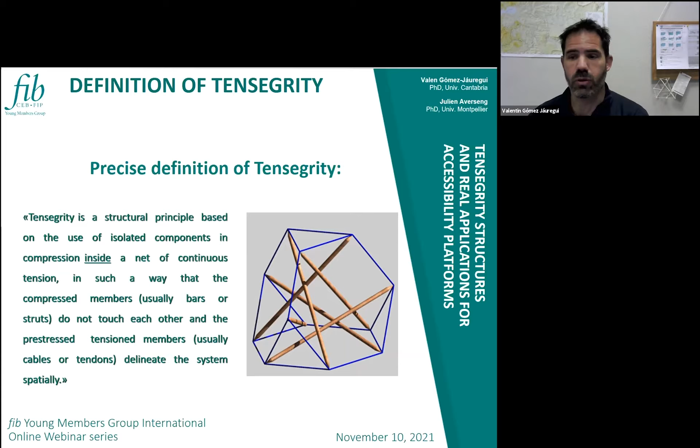What is a Tensegrity? This is one of the accepted definitions of a Tensegrity structure. It's a structural principle - not just a structure, a principle - based on the use of isolated components, in this case bars, inside a net of continuous tension. The tension in this case is composed of these wires, elastic bands that you see in blue, in such a way that the compressed members, the bars, don't touch each other. They are isolated and attached mainly by tension members, which can be these elastic bands, membranes, or any other tensed element. Very importantly, the boundary of the tensegrity is composed of members in tension - there are no compression elements around the boundary.

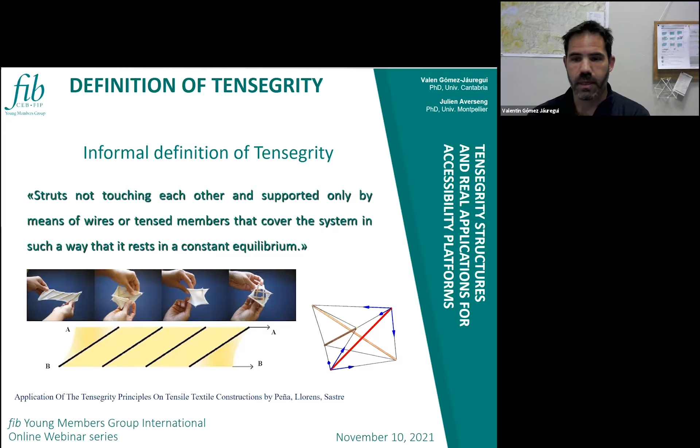There are some other examples and definitions, but in this slide I want to show you another possibility of changing those elastic bands for membranes, as you see there. Many other definitions exist, but one of the most important sentences about tensegrity was given by Buckminster Fuller - we'll talk about him later because he's one of the fathers of tensegrity.

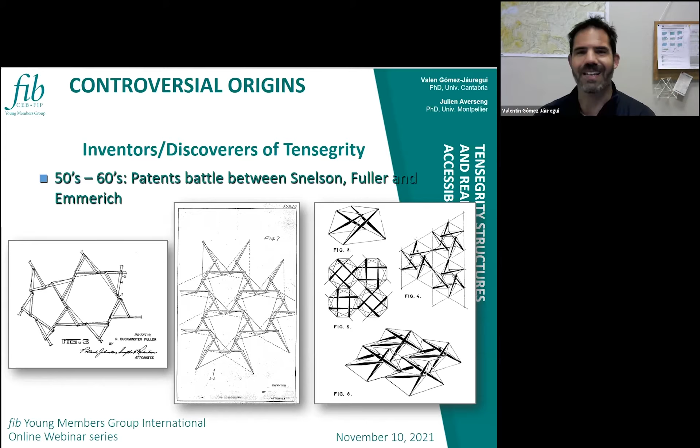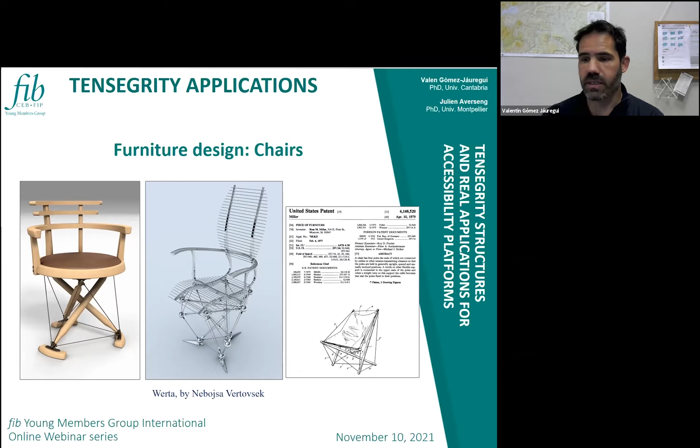You can find tables, lamps, and some other applications related to animals. On the left, you see an aviary in London, and on the right, you see some cages for fish that are composed of tensegrity structures.

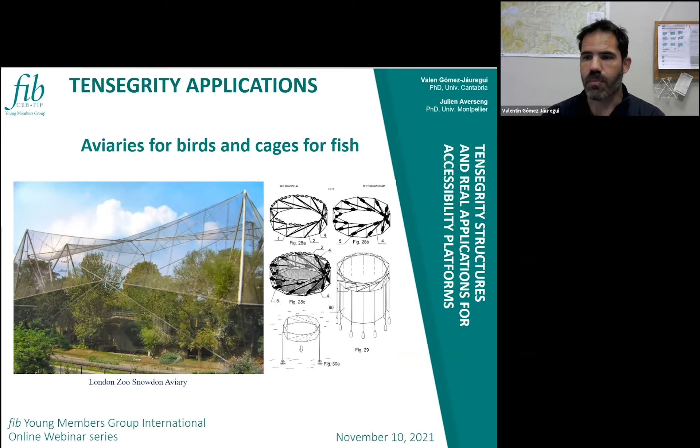Some other applications are related to space. There on the left, you see a boom structure that is deployable and tends to be a kind of antenna that can be deployed. You can bring it to space very easily in a very compact form, and then deploy it once you are there out in space.

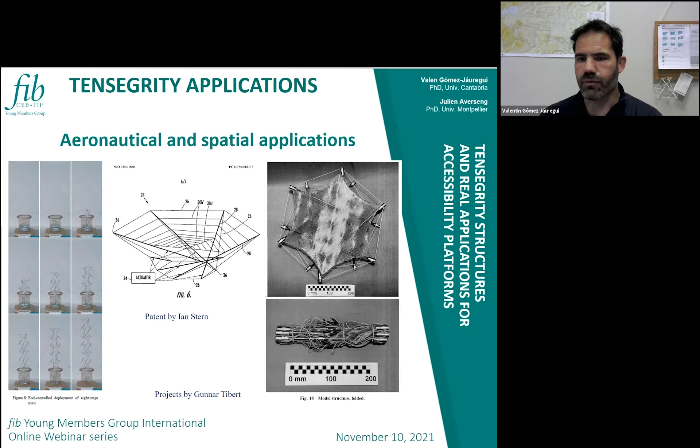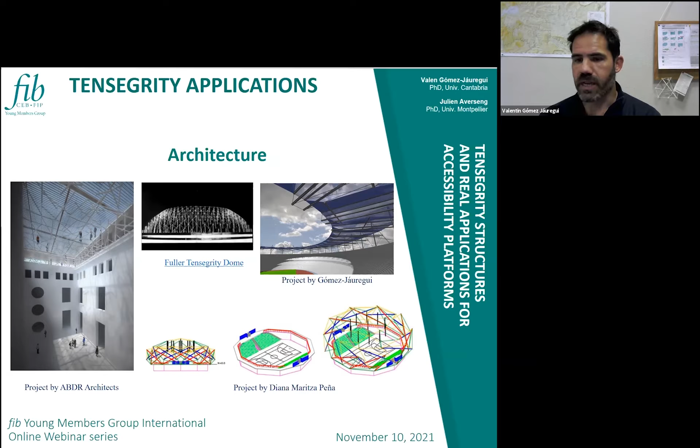In architecture, there are also some examples that you can see. Some roofings, some domes, stadiums, or omnisport halls. And finally, well, some other examples of different kinds of projects or proposals.

Now I'm going to focus on the double-layered Tensegrity grids. There are some kinds of grids composed by two layers, one on the bottom, one on the top, composed by wires. You have also some web wires going in the middle, and there are also some struts composing the whole structures.

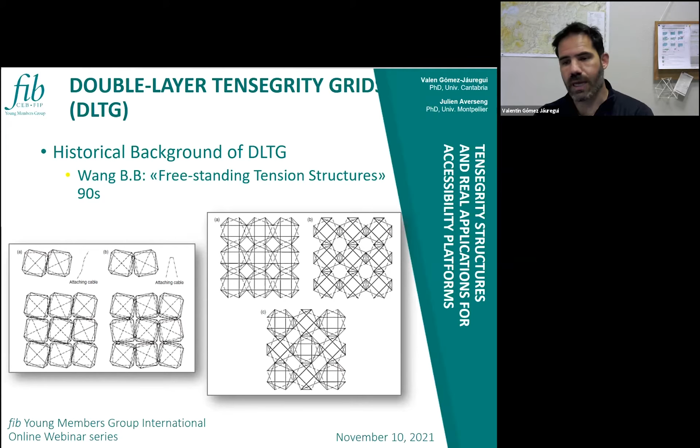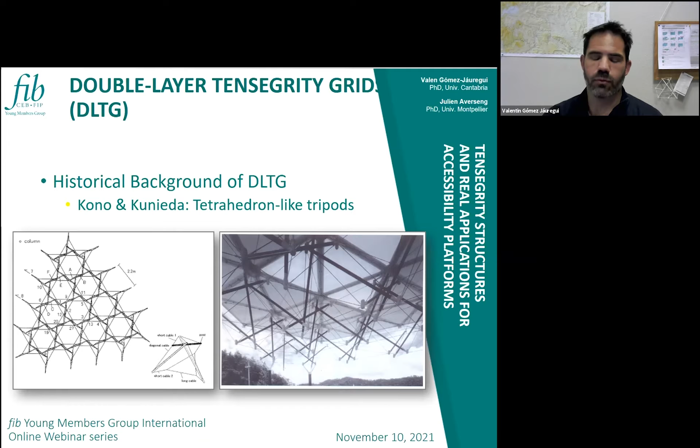Emmerich in France also created or designed different typologies. Wang Bingbing wrote a whole book about different typologies, and the grids were also very important. Kono and Kunieda created a different kind of structure, building some prototypes where instead of using prisms, they used pyramids, truncated pyramids.

And finally, well, most importantly, because Julien belongs to the University of Montpellier, this research group, led by René Motro, created the Tensarch project. There you can see some proposals that are going to be explained by Julien later. And well, these are some other variations of this project, of the Tensarch project.

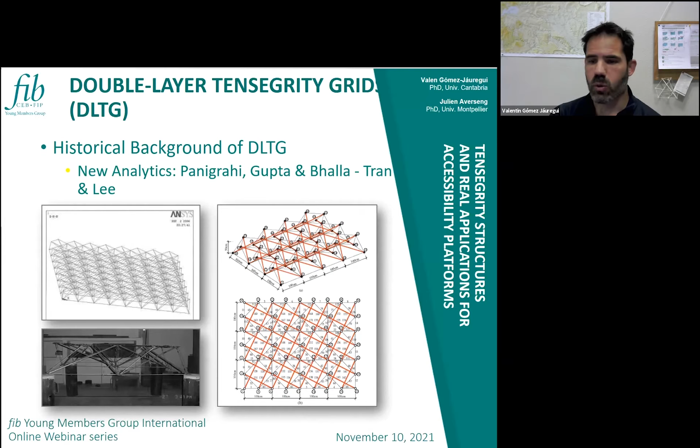Well, in the last years, there were also some other projects. And here, I don't know if I can reproduce an example that we did in Limerick, in Ireland, with a different kind of module, which is the one that you see there.

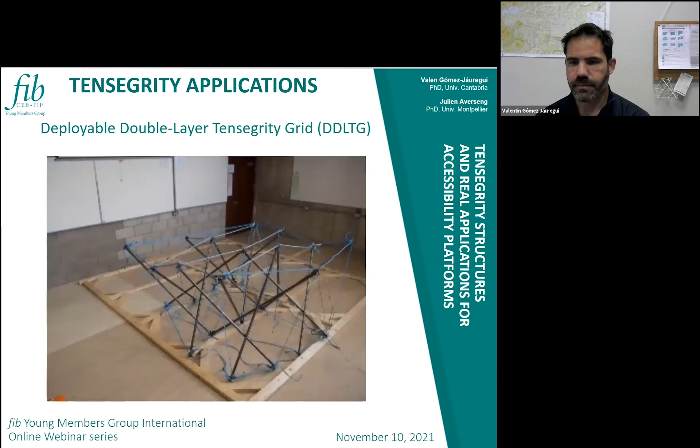And here we can see the construction process. This part is a prototype of 2 by 2 meters using strings instead of wires. There is the folding state. And then we reproduce that for the 4 by 4 structure.

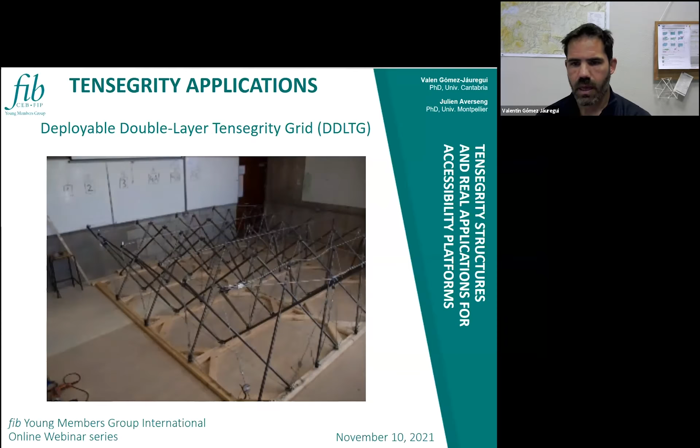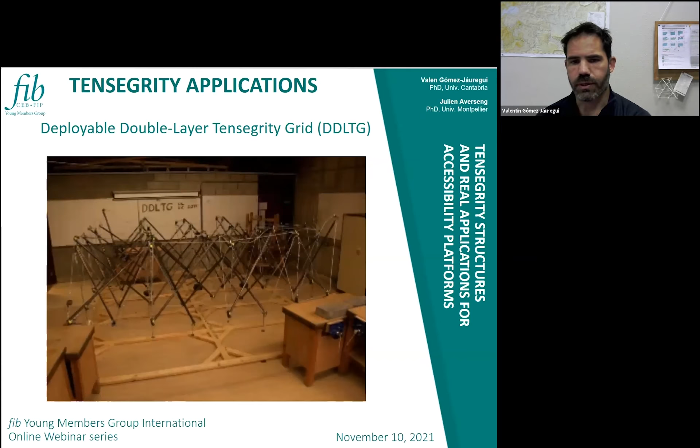The wooden base was configured to set the exact position of the nodes at the bottom. Once the structure is configured, we started to load it, to see the resistance, which was very good. And finally, we did the folding states.

And there is the final structure once it's deployed. Folded.

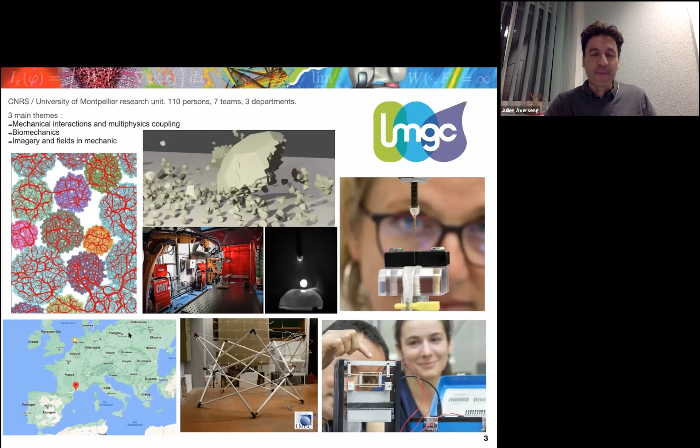I made a slide but won't stay too long on it. We are here in Montpellier, and our lab is interested in mechanical interaction, multi-physics coupling, biomechanics, imagery. We do both numerical and experimental studies, and also Tensegrity and deployable systems.

The context of what I'm going to present is a project proposed by architects based on the observation that there is no solution for disabled people to go to the sea in full autonomy. This project, POSEIA and C4All, wants to improve that by providing solutions for accessibility for all, while also respecting the littoral law, which requires setting up structures only in spring and dismantling them in autumn. To be viable, it must be fast and easy to use for local operators, either private operators on the coast or public cities.

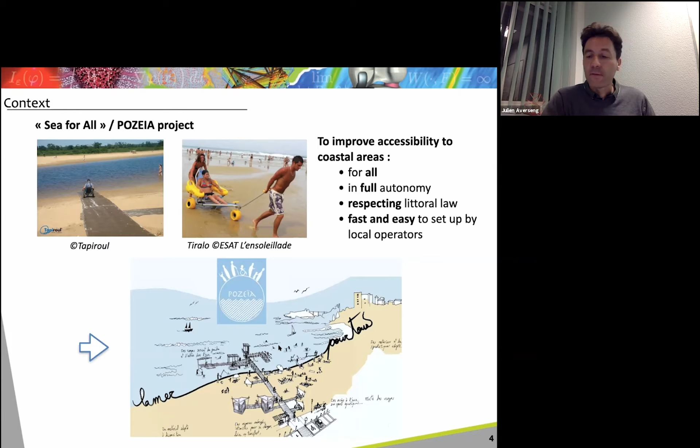So the concept is sketched here. It's a zone with access via the road, with buildings providing the possibility to change, and a structure in the sea with elevators which allows disabled people to do recreational activities.

What we did with this concept is propose a solution for the platform part: a deployable platform on which we can install autonomous equipment like elevators.

Our inspiration is a solution that exists in France called 'un fauteuil à la mer.' This structure is next to a bar and a private beach. On it there is equipment like a water elevator that can be used by disabled people in relative autonomy, as you see in this picture.

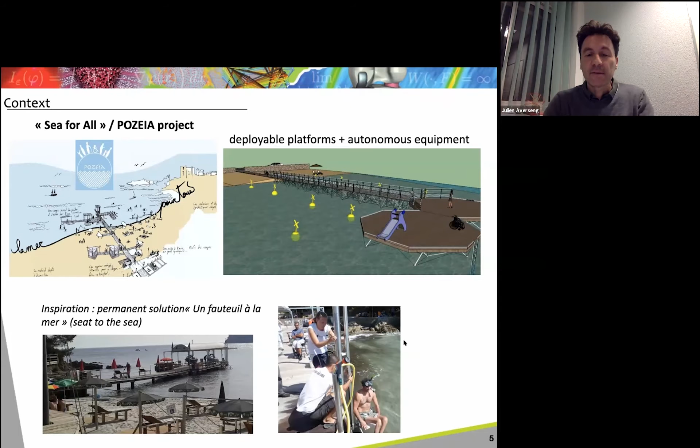Our goal is to make the same thing, but completely deployable and dismantleable, so as to leave the site completely clean after usage in winter. So the platform is to be assembled using Tensarch grid modules.

Tensegrity is a topology that Valen showed you; I will go back over it. The principle is to have modules that can be deployed from small bundles, and we can arrange these modules to build any kind of platform.

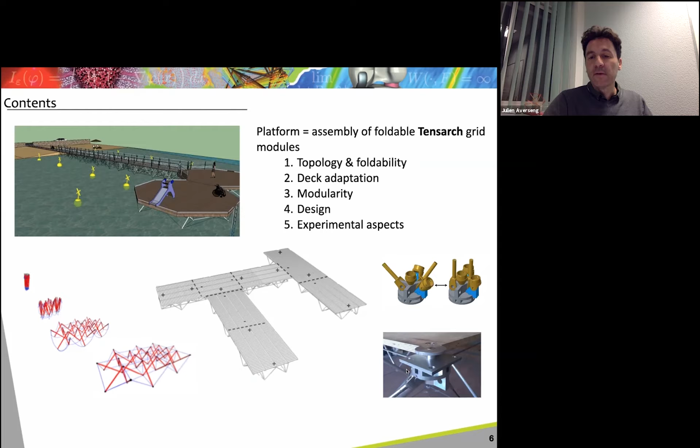This is a summary of my presentation. I will talk about the topology and the interest of foldability with this solution, the adaptation to support the platform and its modularity, the consequent design problems, and finally the experimental part with fabrication and setting up.

To remind you about Tensarch: it's a concept proposed by René Motro in the late 90s, built and concretized here in Montpellier in 2000. Here is a photograph of the great grid, which is 80 square meters. The principle of Tensegrity is a weaving of struts, just like a fabric.

It's a class 2 Tensegrity system, because you have 2 bars at each node, except at the border nodes, which receive only 1 bar. The struts are surrounded, as is the principle of Tensegrity, by a continuum of tension formed by 2 layers of cables, plus boundary cables that finish the stitching around, and vertical tensioners.

So to give you an idea of Tensegrity, it works like inflatable systems. If you have already used inflatable paddles on the sea, you'll see the structure is quite the same, with vertical tensioners, fabric vertically connecting the two surfaces, and the pressure inside acts like the struts in our case.

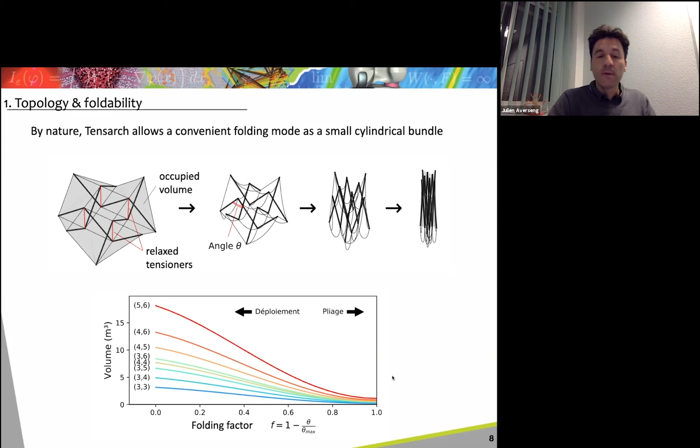About the foldability, Tensarch is really convenient. As you see in this picture, it's only sufficient to detach just a few elements, here the vertical tensioners, to eliminate any self-stress in the system. So, like opening the valve on an inflatable system, you have no pressure, no tension, and you can fold it into a small cylindrical bundle. This diagram shows the gain in volume when you fold the system.

To use it as a platform, we have to put some plates, deck plates, on it, but the Tensegrity topology doesn't offer enough supports. So if you do that simply, you have some parts of the deck that will be in cantilever.

So in this particular solution, we add an additional substructure formed of vertical bars and diagonal bars. The idea of this substructure is to redirect the vertical load onto existing nodes. On this node here, you see the force goes directly into this node, and then the distribution of force goes to the supports. For the corner node, it's the same.

The force goes diagonally down onto this node, and to be equilibrated at this location, you need to have a cable that is attached to this node. So this is the static equilibrium principle of this additional structure.

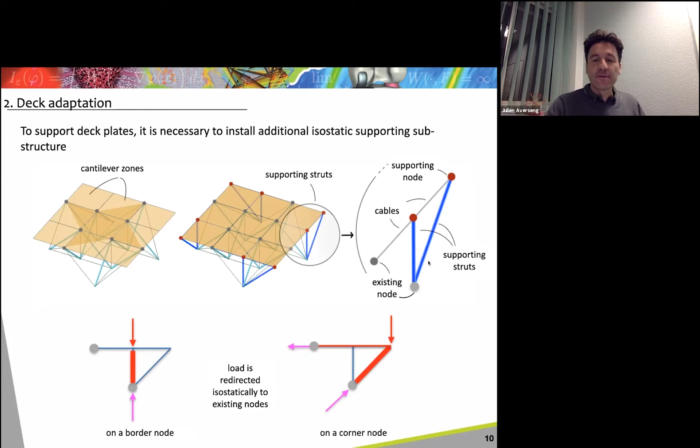The modularity is really important in our solution, because we cannot build a foldable platform of a large surface in one piece. It would be impossible to manipulate or handle it. So we work with several small modules that we attach border to border.

With the Tensarch, which is a regular weaving, you have naturally modularity, but you have to pay attention to the border and to the direction of the pattern of the bars and the nodes. You see here a pattern of layered cable on the surface with cables turning on this side, and to connect correctly, you have to have the inverse pattern on the other side. It's just a small amount of work when building and designing a platform by juxtaposing these modules.

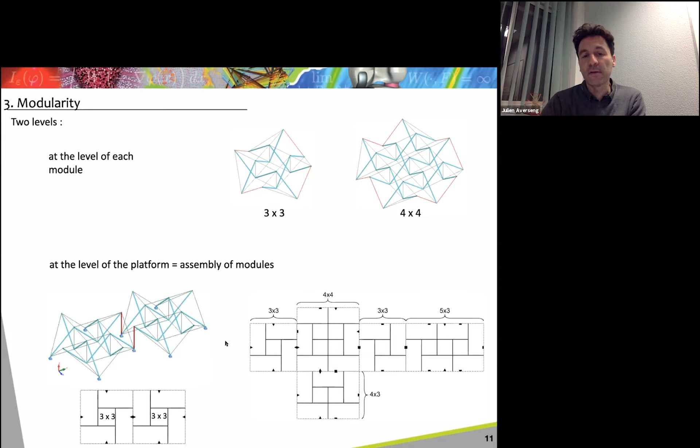After that, you have a complete continuous set of vertical support for the deck. This is the problem I was mentioning: you cannot do that because it's completely inefficient and you don't have any support on the side. You have to invert the two orientations of the modules. We also have the possibility to connect modules with different heights, to adapt to the profile of the land.

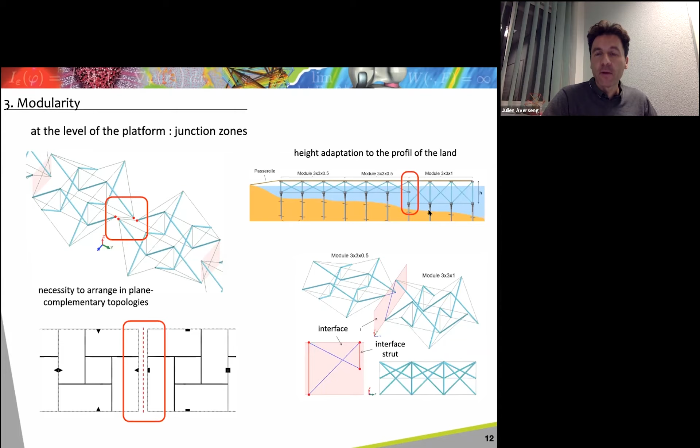You see here how this solution works. It actually works by being supported on the ground. Obviously, it's not floating in the sea. So we can adapt and make a rigid structure resting on the land, and we can adapt to the profile of the land.

On the design part, using these constraints, I won't go into detail for bars and cables, which are standard elements, but the real challenge in every Tensegrity system is the nodes, because they have to ensure convergence of forces, and we have many elements for some of these nodes.

In our case, the nodes must allow folding by letting the bars rotate relative to one another. We also want to minimize the complexity of the solution, so as to have only 3 types of nodes, represented here: center nodes, which we call regular nodes, border nodes, and corner nodes that connect cables with 2 different orientations.

So you have here some drawings of the mechanical models, and you can see the complexity of the design respecting all of this.

On the design, we also have to dimension the sections of the elements, the cable and the bars. So for that, we have to deal with the self-stress that we will have to introduce in the structure, and also the variation of internal forces during usage when you have a vertical load on your platform.

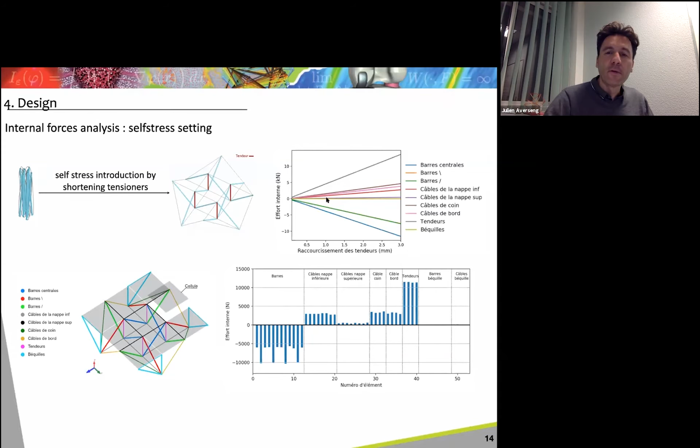So when we use the self-stress system, we do that by shortening the tensioners, by rotating them. It's just a system of screws. And the shortening is very small, on the order of only a few millimeters. So the response in the structure is quite linear in this case.

So don't worry, I won't present some complicated charts, but just internal forces bar diagrams. And about the design, we have to pay attention to and optimize the position of the supports.

So here is the first study on different kinds of supporting possibilities. You have here in black the supports in the corners, or just on the four lower layer nodes in the center, or here a mixed combination of the two previous solutions.

And we have here the consequences when loading these modules by a force of 3 kilonewtons per square meter, and the initial self-stress of 0.2%, and the consequence in internal forces and also vertical displacements.

And we see that with this solution, we minimize vertical displacement. So this is the optimum solution for this small module. The other solutions are less optimal, and particularly this one with an increase in forces.

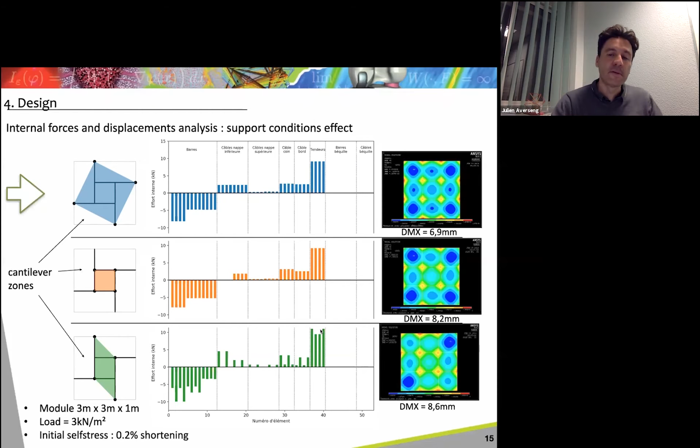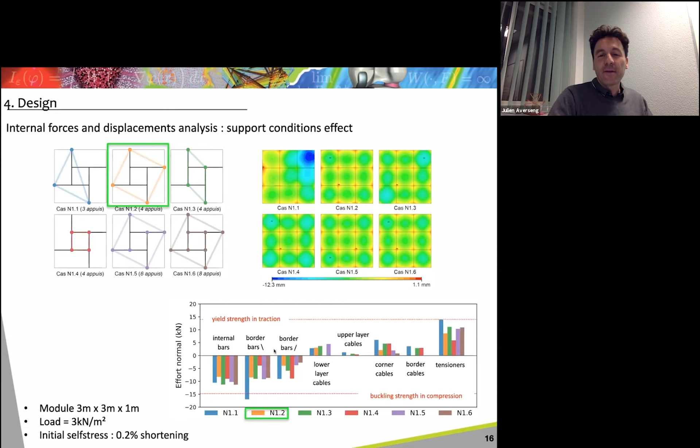We were also interested, well, this is the same, but presented differently, with the sum up of the different families.

We're also interested in the same study by optimizing the number of supports, because the creation of the support in the sea is quite laborious, so we have to minimize it.

It's not a great gain in the number of supports, but it's necessary to ensure not so important vertical displacement, and also not so intense variation of tension in the internal forces of the elements.

And we see here for solutions like that, that we have too many forces after loading. We are going beyond the yield strength for the cables, and even the buckling strength in compression for the struts.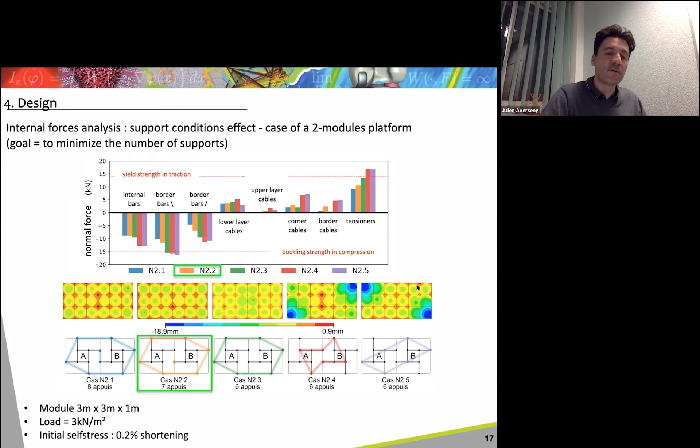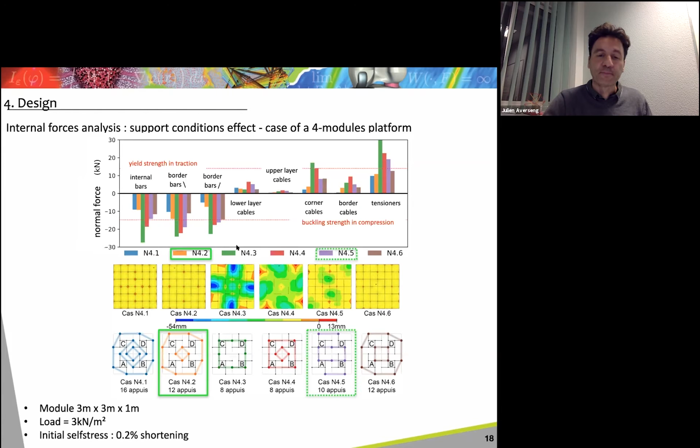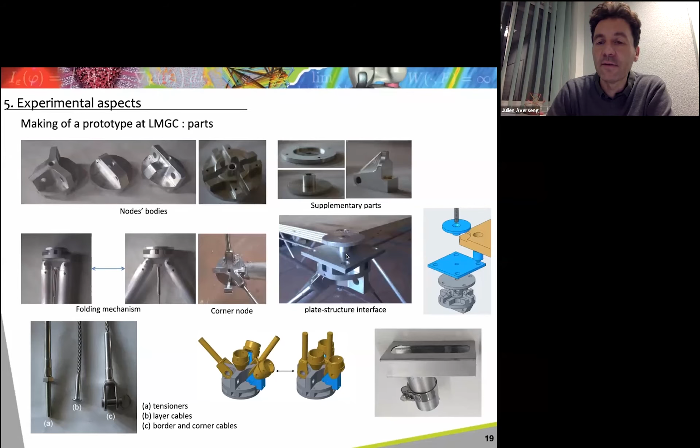And also on the practical parts, we have here the interface between the supports and the structure itself, using a translating system that allows correcting the imprecisions in implantation of the supports. And here a design of what you see in photo of the connection with the plates.

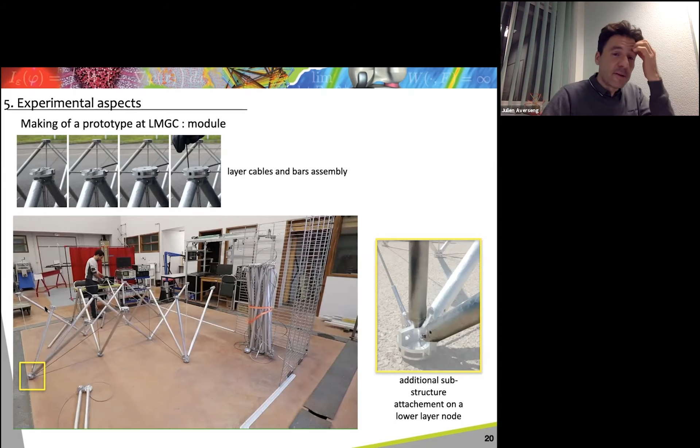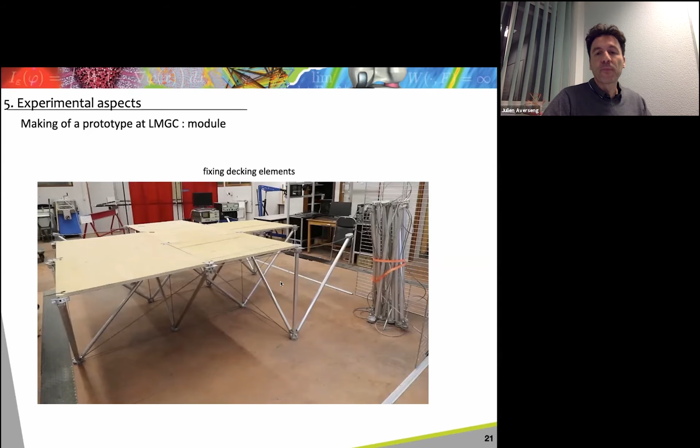So here's an illustration of the deck. You see here the substructure system, the isostatic system that is added afterwards. We have the same here. And then the structure is complete.

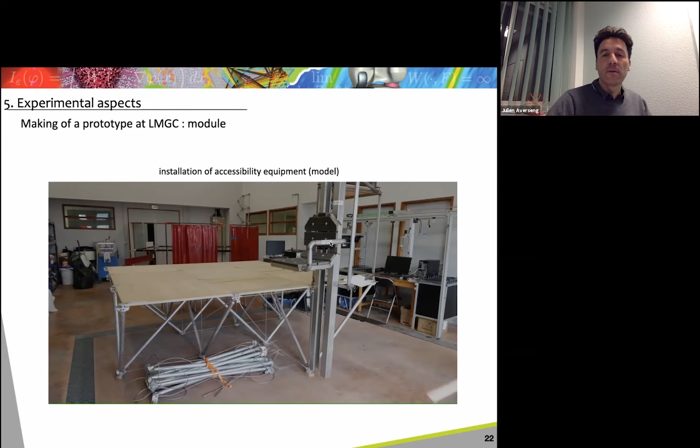We also added on it - I won't go into detail - but we added a model of accessibility equipment, which consists of an elevator to ensure translation in the water for disabled people.

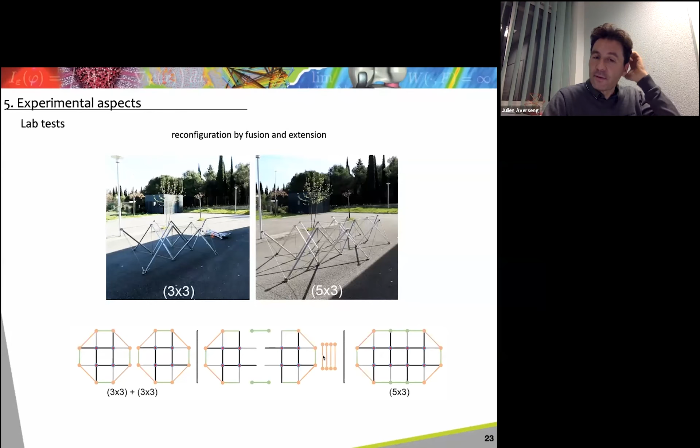And the reconfiguration works because it's modular - every layer cable is the same, each bar is the same, we have the same tensioners. So we can just play like Lego, dismantle a part of one module to connect it to the other and form any other module.

Here's the tensioner. It consists of a bar with a turnbuckle that allows us to reduce the length precisely.

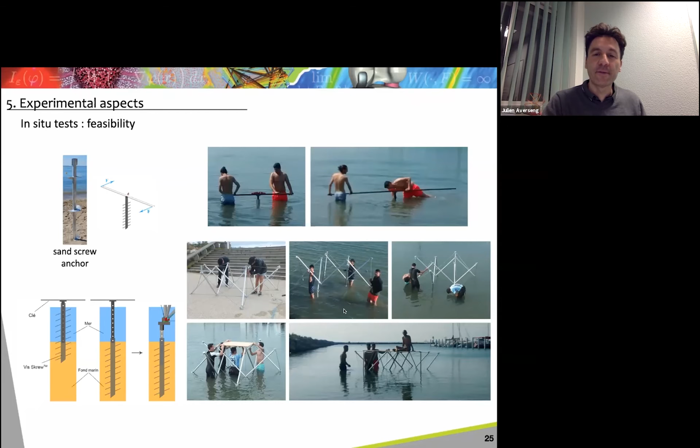In this first test, we couldn't put any more deck plates because there were problems with the precision of the implantation of the supports. After that, we did also some other tests here on open sea, on open coast. We could tackle the difficulties of implementing the sand screw anchors, and we succeeded in putting the deck quite completely, along with the complete structure.

Obviously this is not complete. These are first practical tests, and we have to improve that by improving the guiding and motoring tools that allow us to implement the screw implementation procedure. We also look for other experimental sites, which is not easy because all the coast is used for tourism. So in order to really test the solution and the effect of erosion, for example, we need a site with long or mid-term possibilities. But actually, we could demonstrate that we can implant a structure.

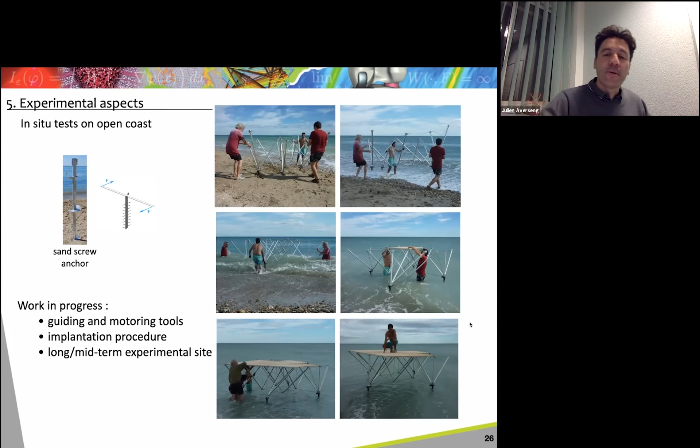We also have to test the modularity by implementing 2 systems and joining them on the sea. And also think about the other structures, the equipment, etc.

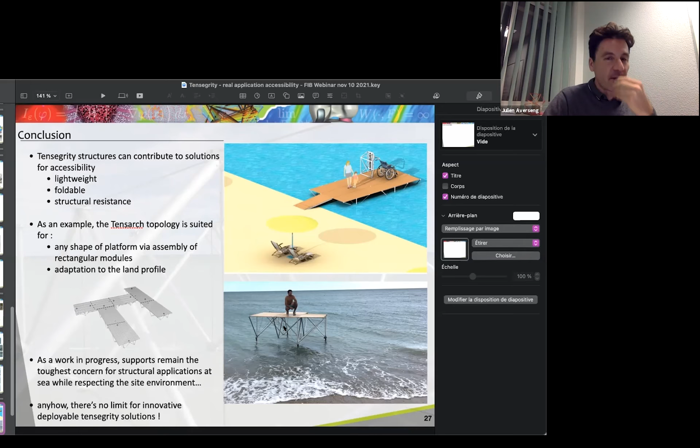So in conclusion, with this presentation I showed you that tensegrity structures can contribute to this kind of solution for accessibility by being lightweight, foldable, and structurally interesting. In this particular example, we can build any kind of platform using the rectangular modules. And obviously, there is also a lot of work to do with the supports, but this is another story that is going on at this time. So I will stop here.

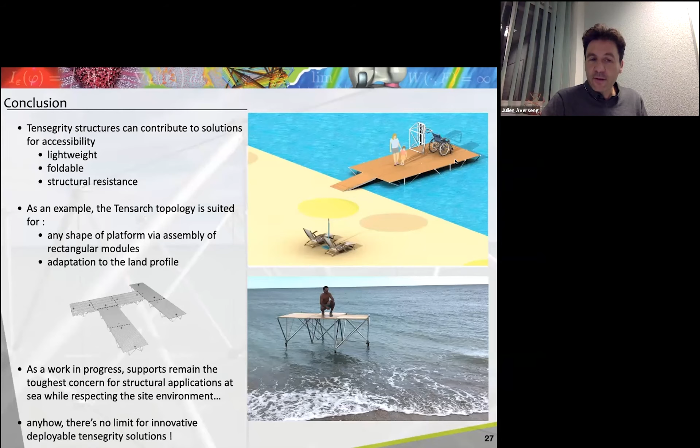Thank you, Julien. So now we will start with questions that you can write down on the chat. Ready for that? May I start also addressing some questions to you. So first, Julien, thank you for this interesting presentation. My first question would be for you.

Is this part of a project already closed, or is this something done at the university that will be serving as a practical platform for being deployed or installed in several points on the coast, or is this something very singular from your side? What is exactly the root of this project? Who was supporting this project for being performed, apart from your research group?

Yes, I didn't talk a lot about that. We are supported by our region, by public authorities. We were helped also by the metropolitan cities of Montpellier, La Région Occitanie, our region, and also supported by our university. This is what I am showing at this time. And yes, this is a work in progress, in pre-maturation. It's not ready to be used, as you see, but we are advancing.

In proposing this structure, the final destination is also an open question—well, semi-open, because we are targeting the local operators on the coast, the cities, and we are discussing with them to buy this solution through the intermediate of a company, maybe, that is to be set up. This is the work of our valorization service in the university. So the economical model is not quite finished, because we have to convince people that this solution is good for them.

And in France, accessibility is a real problem. So we have behind us associations and disabled people to promote this solution, but also public operators like the region.

So the idea is probably to install these platforms temporarily, during summertime, because these are not ready probably for wintertime. No, it's by design—it's meant to be temporary, because we have to respect the coast. And this is good also because the possibility to be easily mounted or dismantled is actually an advantage of adaptability.

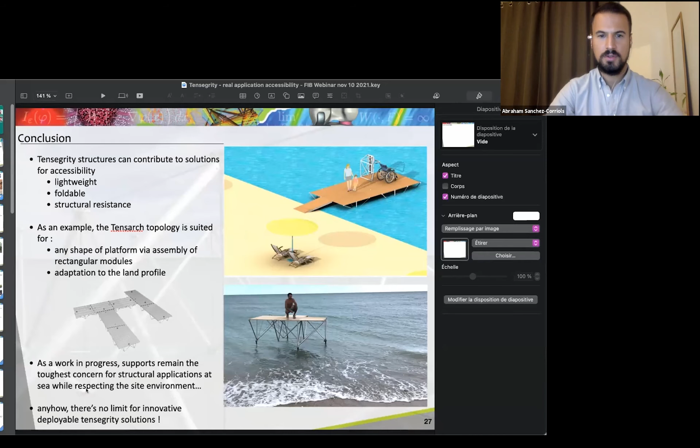Then the first question we received from Tomás Dalda, which also links up with my question—the next question I have for you both. Tomás is asking, are there limitations of this system? So for tensegrity structures in general, for large footbridges, large spans—I think that's what Thomas meant. My question is, do you both think that tensegrity is only oriented, or almost only oriented, for smaller structures?

Because so far we haven't seen any big projects developing tensegrity systems on big structures—domes, footbridges, bridges. We only saw one good example from Valen presented here, and otherwise smaller structures using tensegrity, but not big projects expected to use this structural system. So what are the problems there—deformations, materials, complexity of installation? What do you think are the problems?

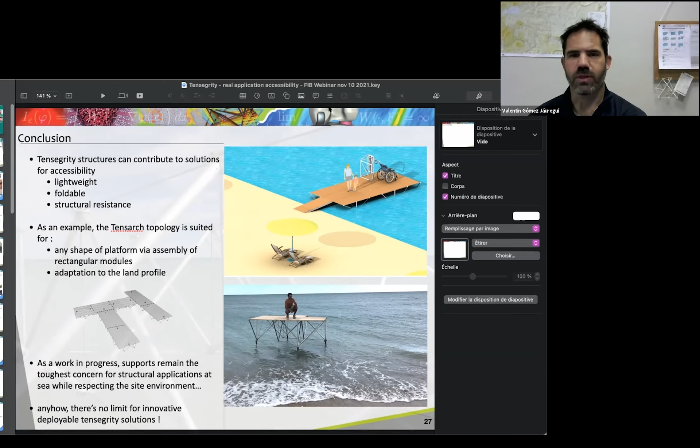Well, I think there are many challenges that we have to accomplish and analyze in depth. About deformations, yes, that's one of the main problems, but they can be minimized by using more elements, more tensed elements, for instance, or by changing the topology of the structure. However, it's more difficult to control the vibrations than the deformations, and there are many studies trying to minimize that effect on this kind of structure. As you see, these are very shaky examples, but whenever you build them with proper construction materials, you can have more efficient structures, as you've seen in Julien's presentation.

I don't know if we will see many pure tensegrity structures in the future for big structures or large spans, but I'm sure they will start creating hybrid structures using this principle to add more resistance in an aesthetic way to conventional structures. That's what some research groups working on this now are thinking about. But we shouldn't forget one of the most promising applications is in space, where the vibrations and deformations are different.

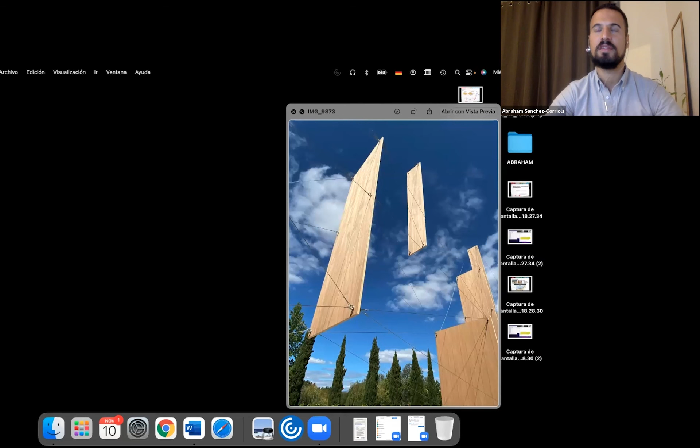He was an artist working with structural systems, and for about 8 or 10 years he has been doing this kind of structure, playing a bit with tensegrity. I would like your opinion on whether something in this direction could be used as a construction structure - architectural or even civil, applicable in a bridge in an easy way. We know tensegrity structures have their own problems, but what do you think about having these applications with simple materials in relatively fast construction for this purpose? One example is what you presented, Julien, and the other is this tensegrity structure, which appears very simple, but I assure you it is not.

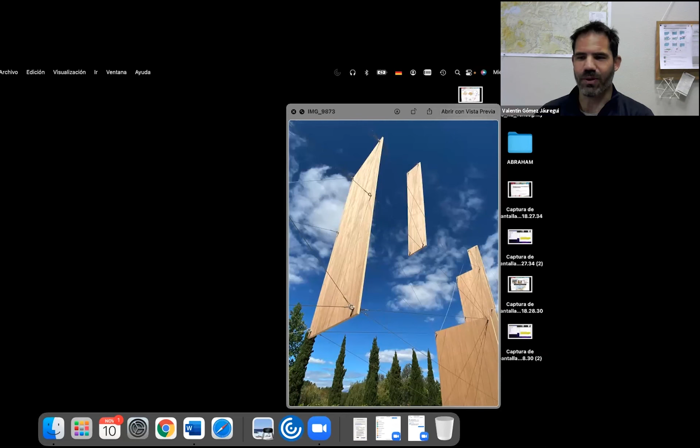Well, I know the example because I know Jordi Gali, and his works are amazing, even if he's not an engineer or an architect. He has some other examples that are also very interesting. I think nowadays we are not ready for adapting that to a resistant structure, but it could be added to an architectural system in different ways. As Jörg Schlaich used to say, Tensegrity is food for thought. This is one of the examples we should take into consideration to include it in architectural projects or designs. I don't know what Julien thinks about it.

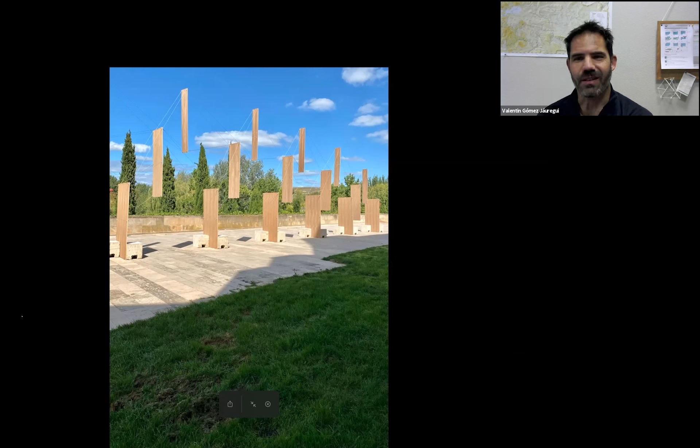So what I saw in this sculpture is more of a tense system that also exists in structural engineering. You have cable beams you see in a facade, in a roof, in a glass facade, which work on the same principle with cables and struts perpendicularly. So some application of what I saw already exists.

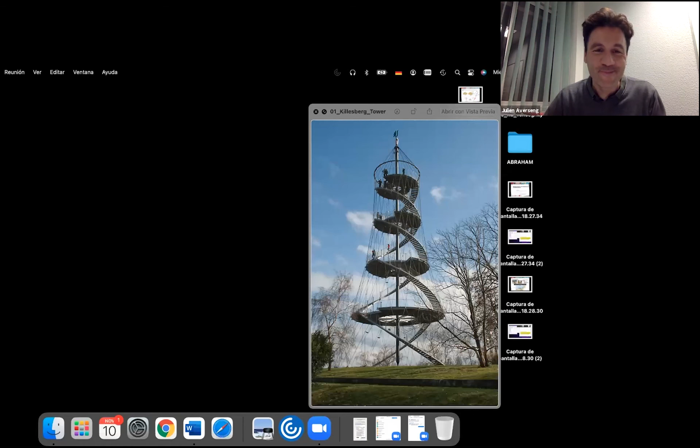So I think my personal perspective is that engineering in general, structural engineering, can go for these kinds of hybrid structures. If I show you some examples from Schlaich's office, it seems to be tensegrity structures, but these are not. According to Valen's concept presented here, these are not tensegrity structures. Partially maybe we can consider them as tensegrity structures, but they are not.

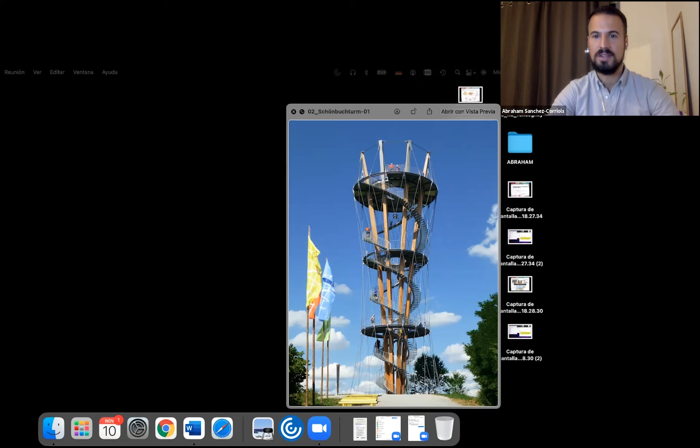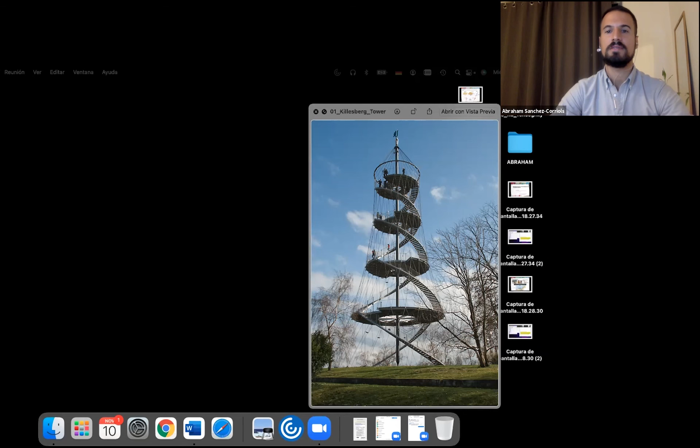Honestly, I don't think we are ready for having tensegrity structures at a big scale so far, because of the materials. Probably if in 10 or 20 years we are able to develop materials with super properties, super flexibility, super resistance, then we may have this kind of structure at a bigger scale. But at the moment this is not possible - it will be possible, but very expensive, and not very competitive with other structural types.

But I agree with you, maybe we are not ready for that, but these kinds of webinars are very important and a good starting point for somebody to start getting into the subject and analyzing different proposals. We weren't ready for the electric car 10 years ago, and now there are many people with electric cars. Time evolves, structures evolve, research groups put things on the market, and I think projects like Julien's are very important to give more chances to this kind of structure, and hopefully in the future we can say we have large span tensegrity structures or big tensegrity structures.

Yeah, for sure. I'd say we have some large span structures that exist, the cable domes - Valen, false tensegrity - but they are very nice large span structures formed by bars and cables, pre-stressed, something that is self-stressed and self-shaped like that. It's difficult because you have some struts and buckling problems, but there are some interesting topologies to be explored also, and why not?